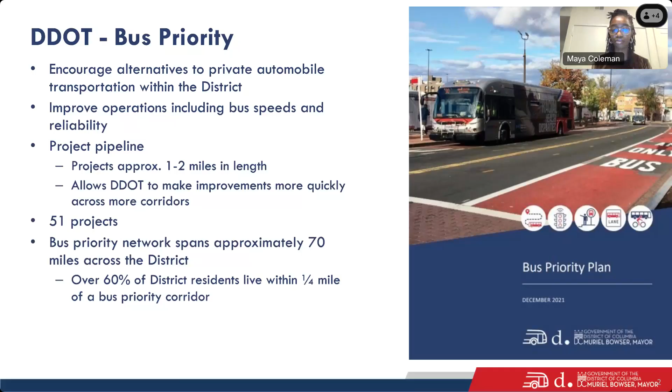Before we get into the details, I want to give some background on the bus priority program. It stems from the bus priority plan published in 2021. The goal of the program is to improve bus operations on various projects throughout the district. We have plans for 51 projects, some already implemented. If you see red bus lanes or bus build-outs throughout the district, it's probably part of a bus priority project. We have a bus priority toolbox with various treatments. As we do projects along different corridors, we look to that toolbox, and based on existing conditions and other safety needs, we apply treatments as needed. These can include bus stop rebalancing, queue jumps, or curb extensions. As far as this project, all of these treatments are included.

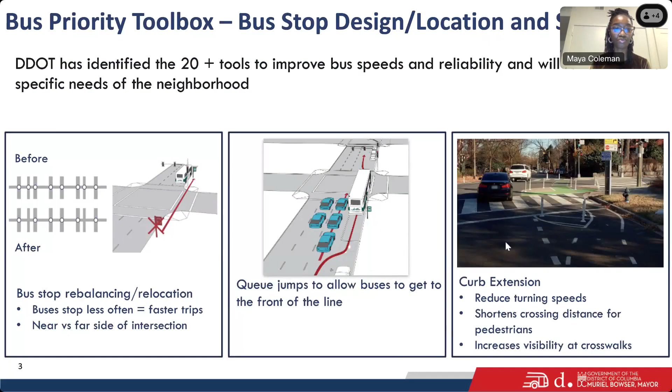As far as project timeline, this project kicked off in 2022, and since then we've been developing concepts based on public and community input. We've also done a lot of engagement with stakeholders, including schools along the corridor, fire and emergency services, and looked at existing conditions as well as coordination with the ANC. We finalized concept plans last fall, so we're now in the design phase for this project, with construction planned for 2026. Given the timeline of this project, kicking off in 2022, we're excited to get started on design so we can see some of these safety and bus improvements soon.

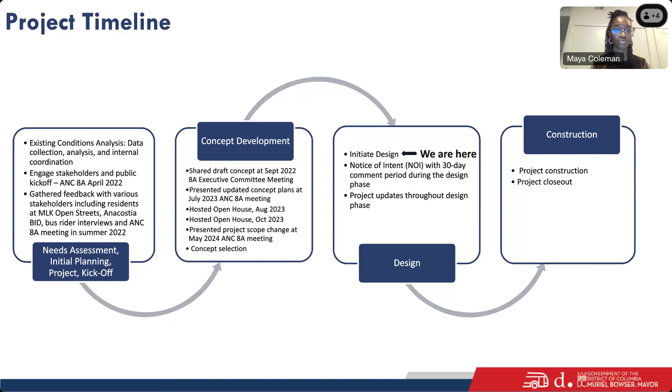So, some general project overview. The image on the left is a photo of our bus priority network. As you can see, there are various projects throughout the corridor. There are 3 bus priority projects along Minnesota Avenue. One has already been completed, and the other is on Minnesota Northeast, which is in planning. This specific project focuses on Minnesota Avenue from Pennsylvania Avenue to Marion Barry Avenue. The project goals are to improve bus operations and also improve pedestrian safety. Some of the project elements are bus priority treatments, such as queue jumps and bus stop rebalancing, and we also had various traffic calming and pedestrian safety installments proposed along the corridor.

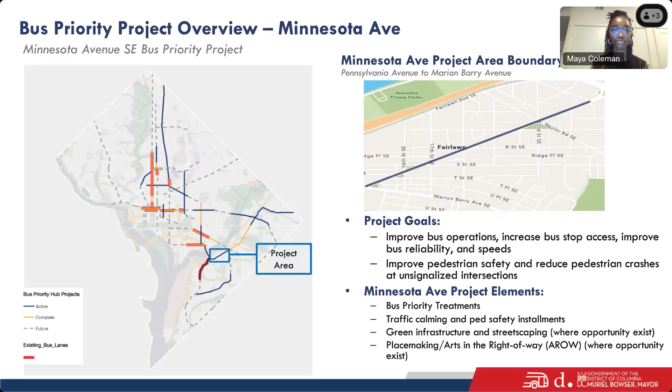So, some of the key project features. Although this is a bus priority project, safety is always at the core of every DDOT project, so there are bus improvement and safety elements included. During community engagement, various safety issues and bus operation issues came up for us to focus on. Some of those being visibility issues—there are intersections where it's hard to see cross traffic, or the intersection design is confusing with insufficient signal timing. One intersection specifically called out was Minnesota and 18th Street. We also got a lot of comments about dangerous driving behavior along the corridor, especially high speeds at unsignalized intersections. There's also a lack of pedestrian safety, which is really important given some really wide and angled crossings along Minnesota Avenue, and a general lack of bus stop amenities such as shelters or access to bus stops.

This project addresses these issues by installing various traffic calming treatments, including pedestrian islands, medians, curb extensions, and enhancing crosswalks by shortening crossing distances and realigning them. Also the installation of RRFBs to give pedestrians a stronger chance of crossing safely. There are also bus operation improvements such as stop consolidations, amenity redistribution—mainly shelters—and a queue jump proposed to lessen bus and traffic congestion while improving stop accessibility. I want to note that this project does not include bus lanes or bike lanes, and there are minimal parking impacts as part of this project.

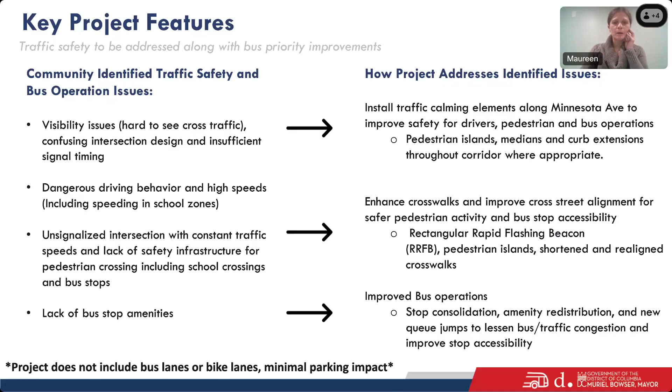All right, so we'll go over the concept plans. These are various traffic calming and bus priority treatments along the corridor, from Minnesota Avenue at 16th Street to 17th Street. Some of these plans include T intersections to reduce turning speeds and expand pedestrian zones. We're also proposing new crosswalks with pedestrian islands and RRFBs. We have some centerline hardening proposed just to buffer the separation of lanes. One thing I want to call attention to is this closure of S Street.

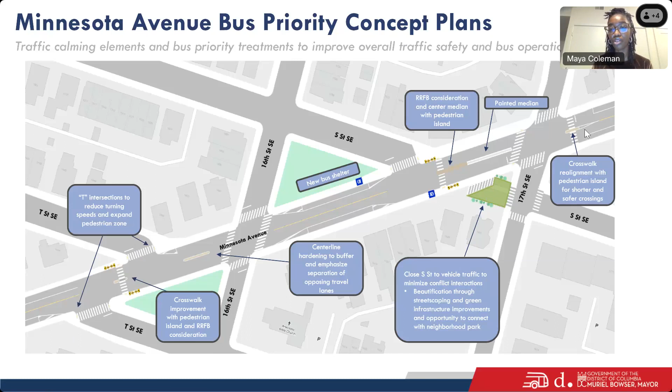This closure is proposed to reduce vehicle conflict with cars and buses turning from Minnesota Avenue using this turn lane, and also directly from Minnesota Avenue, to minimize those conflicts. Here's an example of what this closure would look like, using flex posts or planters. It's something we'd like to try temporarily with these materials to make sure it works for buses, general traffic, and pedestrians.

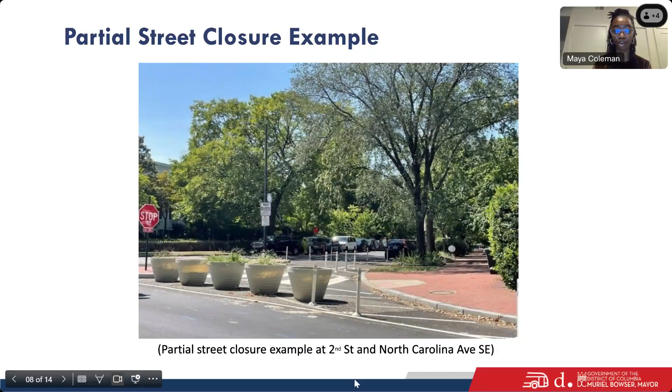And this is an example from a partial street closure at 2nd and North Carolina Avenue.

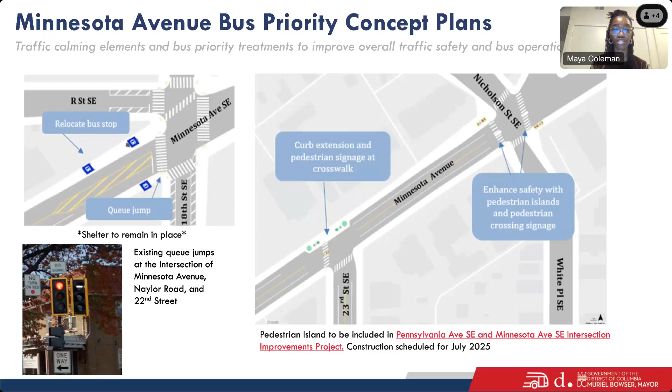Closer to the end of the corridor at Nicholson and White Place, we have new pedestrian islands with crossing signage, which will be installed as part of the Pennsylvania Avenue, Minnesota Avenue intersection project. And in front of Boone Elementary, we have a curb extension proposed with more pedestrian signage for safer crossings to the school and at that intersection in general.

We wanted to specifically highlight the plans for the 18th, R, and Minnesota Avenue Southeast intersection. This intersection was brought up to us by the community, specifically the Fairlawn Citizen Association, about wanting to see improvements. Some concerns raised were that the intersection movements are confusing, there's unsafe crossing, and definitely some major visibility and signal timing issues.

Part of the plans include adding new stop bars to help reinforce where drivers should stop. We also have two new crosswalks: one right at R Street and Minnesota, and another new angled crossing. This is one where we saw pedestrians already making this movement, so we think it's helpful to install a crosswalk with the correct pedestrian signal for a safer movement.

Some other items are painted medians to help clarify travel lanes, and we'd also be extending the curbs and installing ADA compliant ramps. Another thing brought up was that signal timing, especially for cross streets, doesn't allow efficient times for turns or movement, so we're looking at adjusting those signals. Something already being addressed is that trees are sometimes impacting the signals and visibility, so there'll be ongoing pruning.

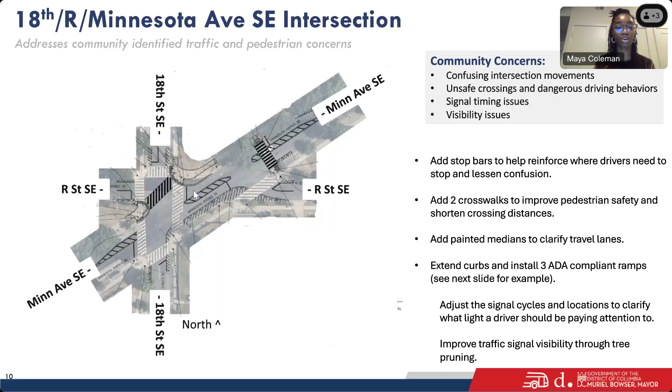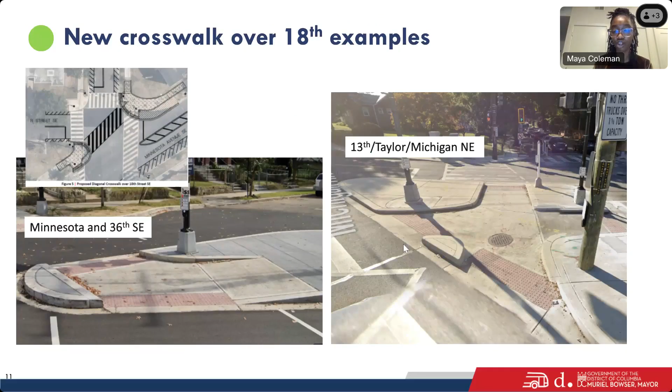Here's an example of what those crosswalks with the extended ADA curbs and ramps would look like, and here's an example of what some of the painted medians would look like.

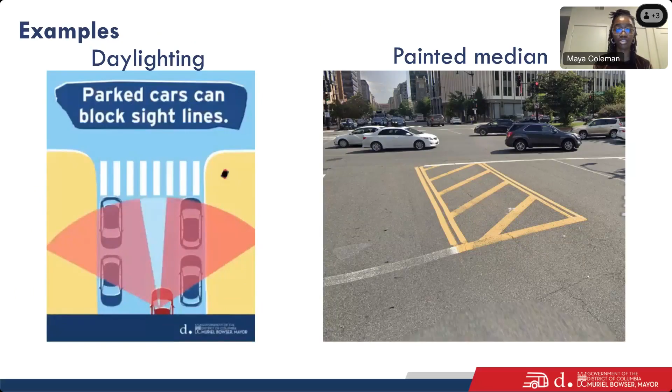As mentioned before, there's minimal parking removal as part of this project. It's mainly daylighting at intersections, areas where you already shouldn't be parking and are already signed and zoned as no parking, so it doesn't create a visibility issue for pedestrians crossing and vehicles at the intersection.

To talk about specific bus priority treatments outside of the queue jump, we're proposing consolidation of the 19th Street bus stops, to reduce bus delay since these stops are close together. Looking at ridership, the Minnesota and 19th Street stops have the lowest ridership among stops along the corridor, so this is an opportunity to improve bus operations by consolidating that stop pair, and we'll have the chance to relocate the existing shelters to more high ridership stops along the corridor.

One or two stops we want to relocate them to are Boone Elementary School, which has pretty high ridership, and Minnesota and 17th Street at Triangle Park, another high ridership stop. As mentioned before, there will be a new queue jump at the 18th Street intersection, working in companion with the existing one at 22nd Street.

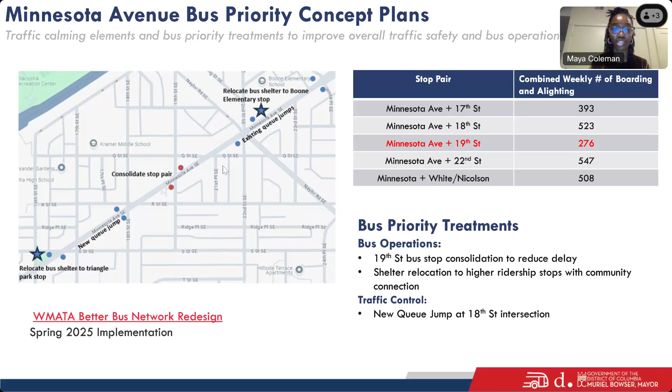As mentioned before, this project has moved into the design phase. We will issue an NOI at 65%, anticipated summer 2025, and construction for this project is planned for 2026.

And that concludes the presentation, and happy to go over any questions or any specific details about the project.